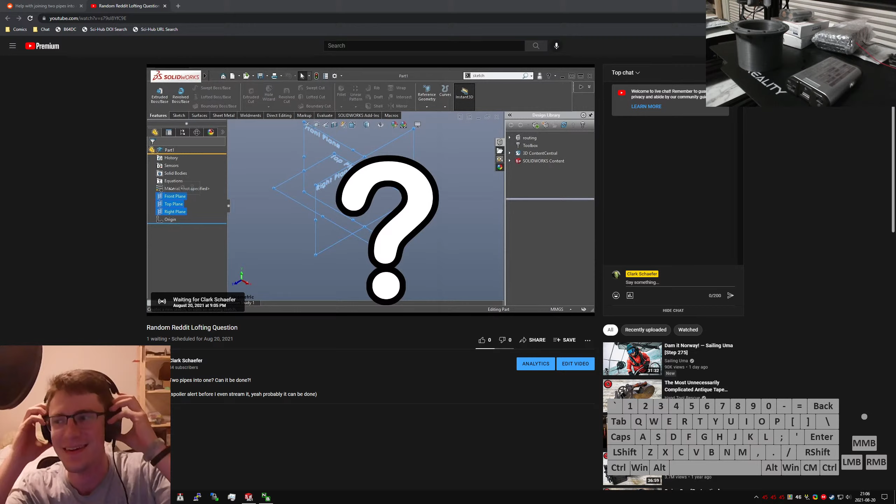Forgot to hit the giant blue button that says go live. Who would have guessed? Anyway, this guy, he's got this part, and I'm listening to myself stream. Shut up, go away, that's very distracting.

So he's got this part, a slot section over here, pipe section over here. That's going to be one extrude, and this one another extrude, probably a thin extrude. Then the rest of it's all going to be lofts to tie everything together.

Hopefully, guy in the future, you will find this useful. So I'm just going to assume, make an ass out of you and me. I'm just going to have to do a lot of assumptions here. We're making some circles using right mouse shortcuts, making them.

Oh, hang on, I did this in inches. New part file, IPS please. IPS, there we go. Right's plane.

Start with the slot feature so it just works. Whoops, hang on, that's all checked up. Okay, let's say inch. Actually, let's say 0.625. Say inch, should probably, hang on, do I have the...

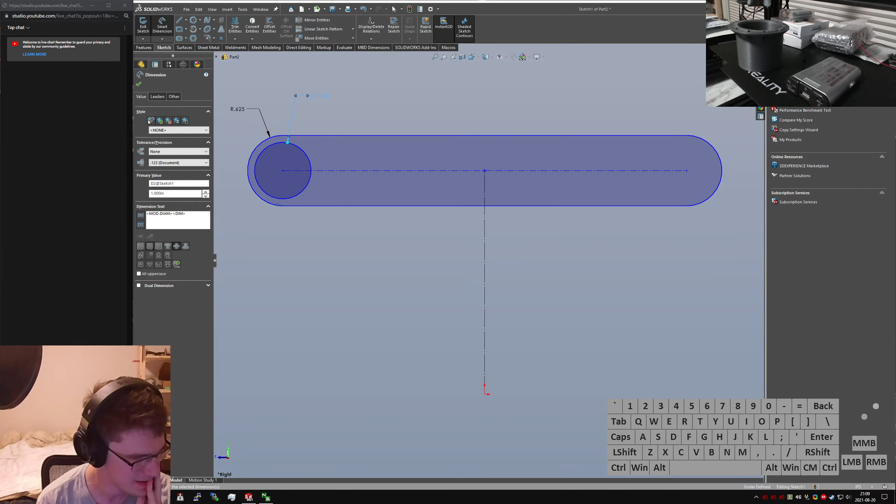Just scroll through my long list of albums and find something. Clowncore is great, but also not suitable for this. Let's listen to Cubic by Light. I think this will take less than the length of the album.

Make those equal. Make this a set distance, like 3 inches. Make this like 2 inches. I want these to be a little bigger.

And that audio is pretty loud, isn't it? It's like louder than me. I prefer to not be.

Okay, we got shape, these are a little closer together I think. The guys, whoops, 2.5, not 22.5. But I should look at this picture again. Yeah okay, we're doing alright. And that's a little less wide than the pipe, so that's fine. We're more like 1.5.

So, extruded boss. We're gonna do 4 inches. Offset of 1.5, and I did it in the wrong direction.

Offset, cool. Got shape 1, right plane. Just gonna do it on the origin because it's easy.

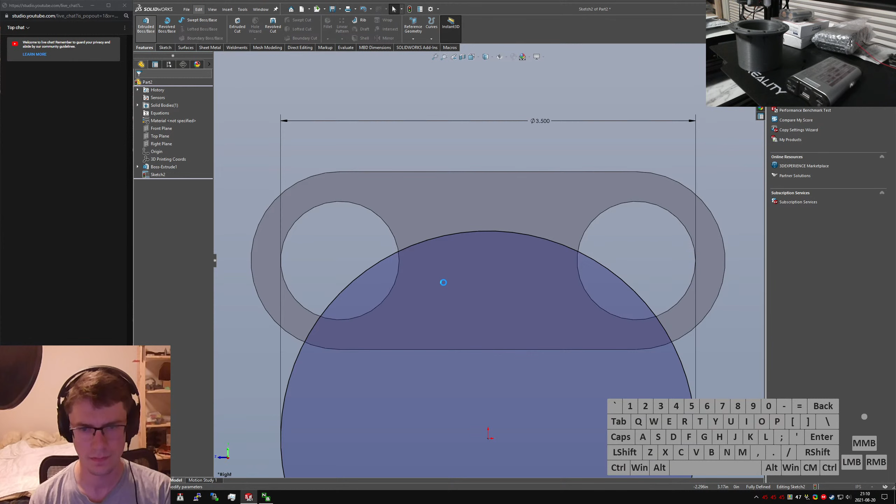So, well, let's make that offset a little bit bigger, I think. That's good, we'll open this up a little more.

Quick reopen, read my comment again. Okay, pipe routing, not the right solution. That's for plumbing basically, it's not for this sort of weird custom joint thing, which I've done before with lots of weird lofts for joining lots of pipes in one thing.

Two separate lofts, each of the two pipes down into the one. A separate loft to go around the outside. Fillet the sharp intersection on the two inner bodies, and then use those to subtract.

And I accidentally made that solid. I think, nope, can't change that to a thin extrude afterwards, so we'll just delete that. Let's say thin feature, 0.25, make sure we're going outboard. There we go, two pipes.

And I'm now realizing he had a lot more space between his. Oh, this one doesn't have an offset. Dirt, dirt, dirt, dirt.

Yeah, there we go. I think mine's a little bit wider than what his was, and I keep closing the stupid window. His are kind of close, but... close enough. If I was smart, I would show up...

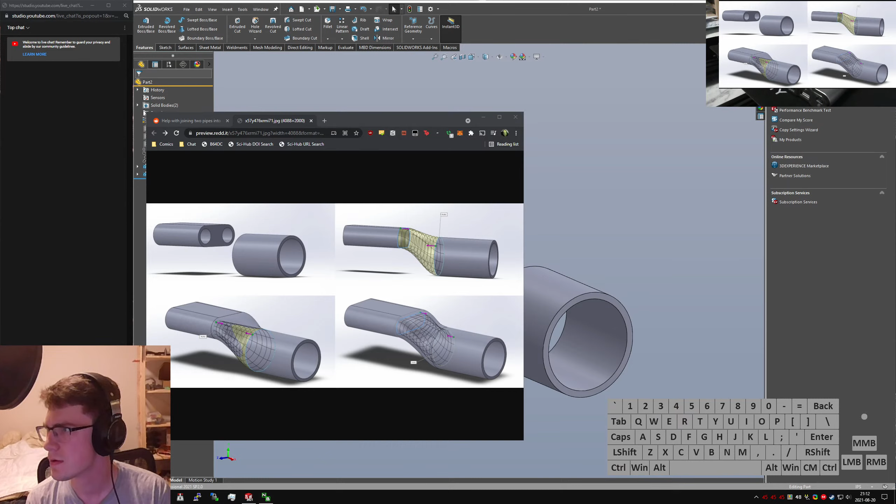Cool, reference image. Who needs an octopi webcam? So I haven't printed anything anyway. Okay, on the fly.

So, loft. Profile 1. Profile... what? I said 2, I clicked the line. Click the line, start, end. Normal profile, normal profile. Here's the one that's like, give me the minimum twist.

Show preview. Okay, that looks fine, but it's not showing me a preview. Display, centerline, more profile, more profile. Yes, but don't merge anything. That looks fine, I will hide that for a sec.

And this music is getting energetic. Whoops, forgot to hit enter and make myself a lofted boss. It's me, the lofted boss. And normal profile, I could have sworn there was a thing in here about having like minimum twist.

What do you mean linear edges? Oh, hang on, no, normal profile. There we go.

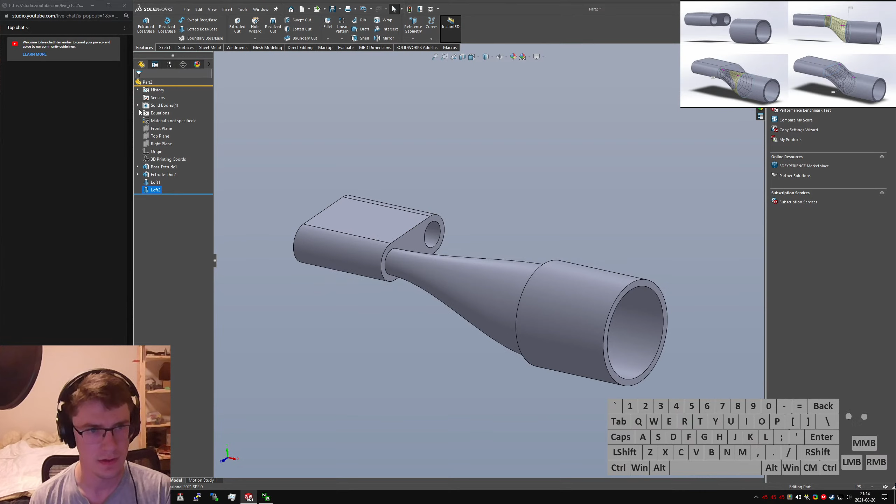So now we show our two lofts. That looks pretty symmetrical. The other thing you could do is, actually, I will just hide that body for a sec, rather than worrying about the possible silliness.

Mirror feature. Actually, I don't want to mirror the feature, I want to mirror the body, so that I have two bodies that I can combine. This way I know for a fact that I have two bodies that are exactly the same.

I don't have to worry about any twisting silliness. So we'll combine those two guys, say add, what? Okay, two bodies. Fillet.

Put that line in there, say 0.5. Maybe 1. Nah, 1's too big, I guess. 0.75 maybe? He doesn't like that either. That looks fine.

Does it? Not a huge fan of that. I think it's one of those things I'm going to have to tweak early in the feature tree once I have the whole rest of it sort of fleshed out. So we'll hide that guy for now.

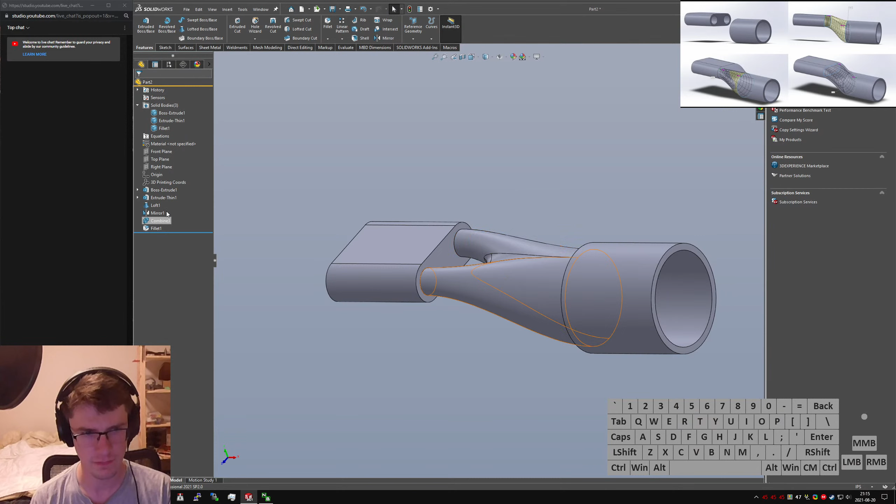Loft, selection manager, pick me a loop. I want this loop, please. Or just don't, I guess. Okay, is this one? There we go, okay. Gives me the profile, and the other profile.

What? Normal profile, curvature to face? Sure, what does that look like? Oh, gross, okay, it's complaining about self-intersecting geometry.

Oh, maybe I should make a center line. Oh, I just had to pick next face. Yeah. Nice, doesn't even look—ooh.

I don't want to merge that yet, don't merge. Okay, combine, say subtract, pick the later loft, then pick first loft. Oh, gross.

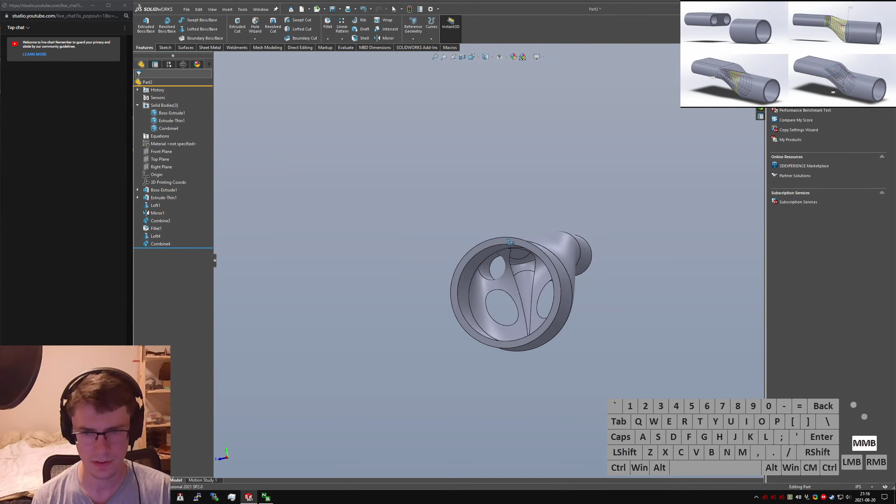Okay, so let's take a step back. Let's visualize this guy, and then turn on transparent for the outer one. And then what I'm gonna do—oh, just show me the freaking preview. Or don't, I guess. Since I suppose that's fine too.

Curvature to face, normal profile. We need to pick the next face. This one has to be like 3. Nope, too much.

And it's 2. That seems fine. Although I think I want to shrink the influence of this one a little bit so it clears that better.

So maybe 0.5. Yeah, and I might even—oh, nope, hang on, now it fails to clear up there. Okay, so we can't deal with just 0.5. It just gets real close in there, doesn't it? Phooey.

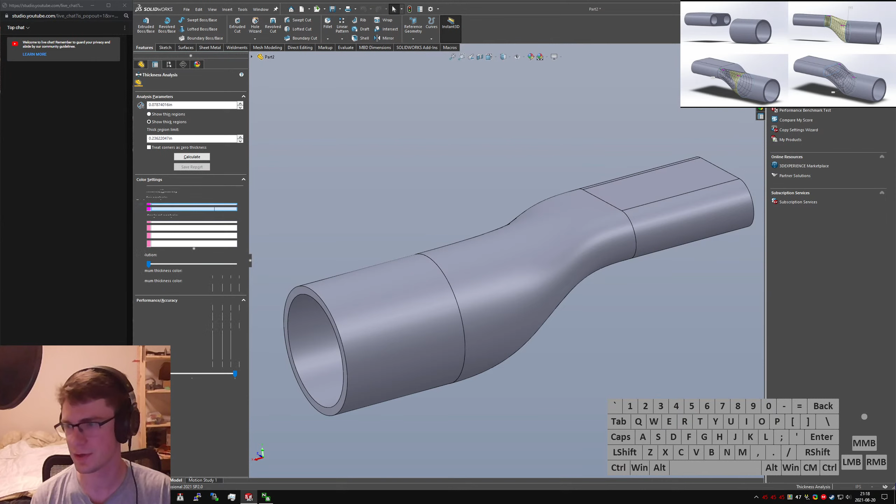And yeah, give me that one. Whoops. I don't use thickness analysis very much, which is why I'm going to make—oh, that's going to be all wrong. Cancel, cancel.

Show thin regions, that's what I really care about. And resolution's probably too high. Whoops.

Hey, I haven't even gotten caught out for playing copyrighted music, probably. I kind of hope I do, actually. It's nice when it gets caught, and then maybe what little ad revenue that I will never see will go to Light instead, because they're a good band. I like them.

Okay, this is going to take way too long. Cancel. Crank that resolution way down. I don't know why left is always less, and I bet it's always less because I always forget to click it.

Ooh, hang on, can I pick just that face? I don't really know how this tool works, so—oh, it seems to be going quicker now. I could also just section through it a little bit, but there we go, okay.

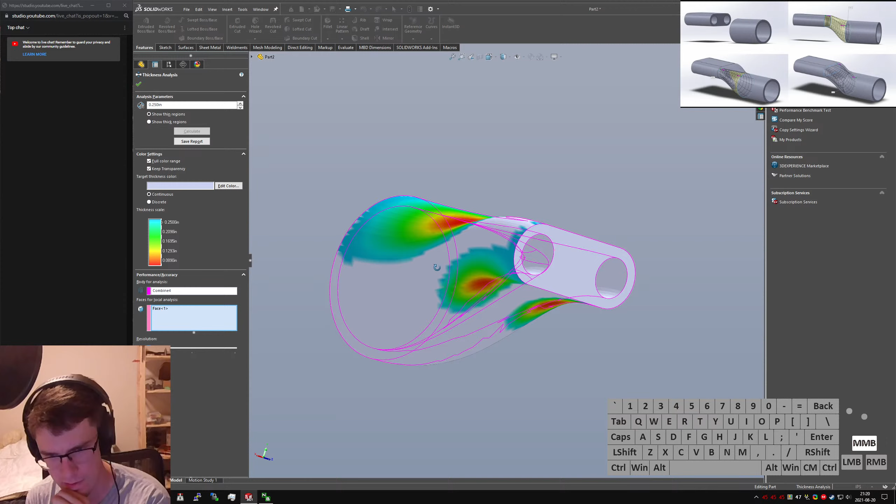Okay, let's try tweaking this loft here. Let's say it's go down to 1 and 0.5. A quick thickness.

Is somebody messaging me? No. Oh. I was gonna send this to a friend. Blank screen.

So now we're dealing with still a little bit tight up there. But if we—okay, hang on, let's do this the easy way. Where are we thin? Normal. Got thin spots up top there.

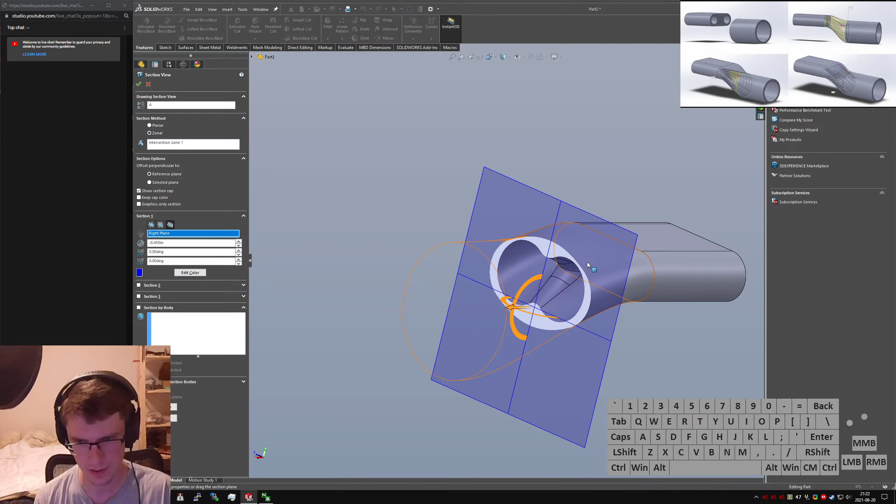What if, instead of combining, we say shell—learn how to spell shell.

Square by Light, very good song.

It's, oh, you know what? That's gonna break horribly because I forgot to click shell outward, and it's really complicated. Oh, hey.

What if instead just worked? Love it when that happens.

So now, what's this loft look like in comparison, like at the same time? Okay. So a little bit of silliness.

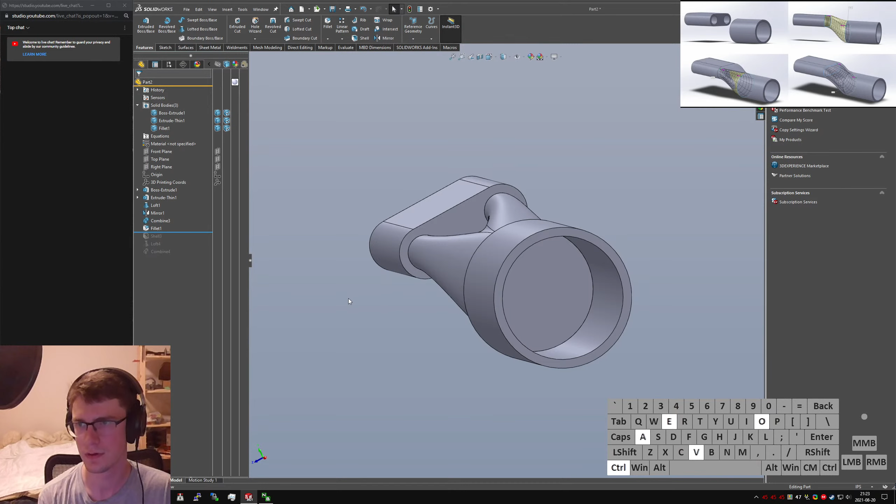But if I want to do that shell, I also have to duplicate the body first. Move, not move face, move copy, please. And we're going to copy it, or copy rather.

So now I shell it, and I still have an inner body, which is good. Ooh, if I apply the shell to the copy body, well, nah, whatever. It'll just break the later combine, and that's fine.

And we can tell the combine to operate using the duplicated body, not with the shell, but with the copy body. And that means the internal faces are going to be the same. So now...

What? Show problem. I don't know why I'm telling you to show problem, because it's not going to, like—oh! Or I guess it'll tell me what the geometric problem is. That usually doesn't, like, work or do anything interesting, really.

I almost want to do this with surface modeling and just be gross.

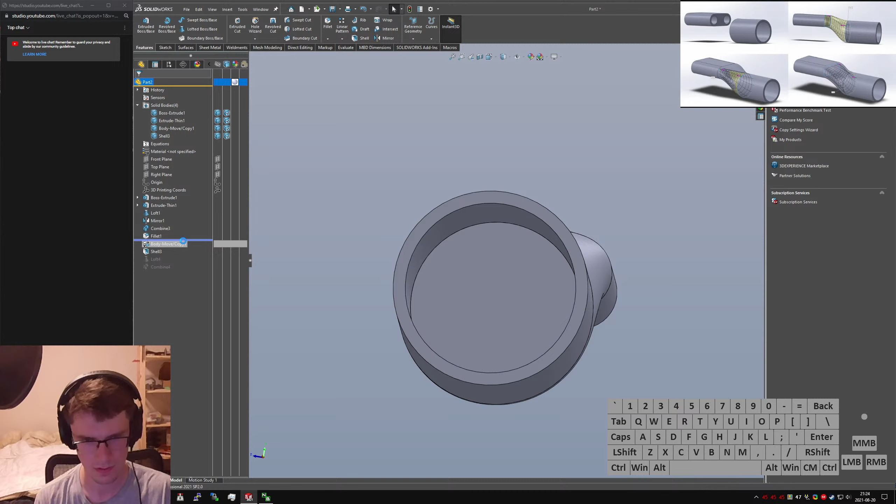How do I fill that space nicely?

Time to throw everything out and start again. We're just gonna, whoops, hang on. Just gonna delete all this. Say, yep, that's fine. Okay. New plan. Sketch. Top plane.

I'm gonna do 2 arcs. We're gonna tell this guy to be midpoint of this line, so he'll be right in the center. Tell that guy to be tangent to that. These two to be equal.

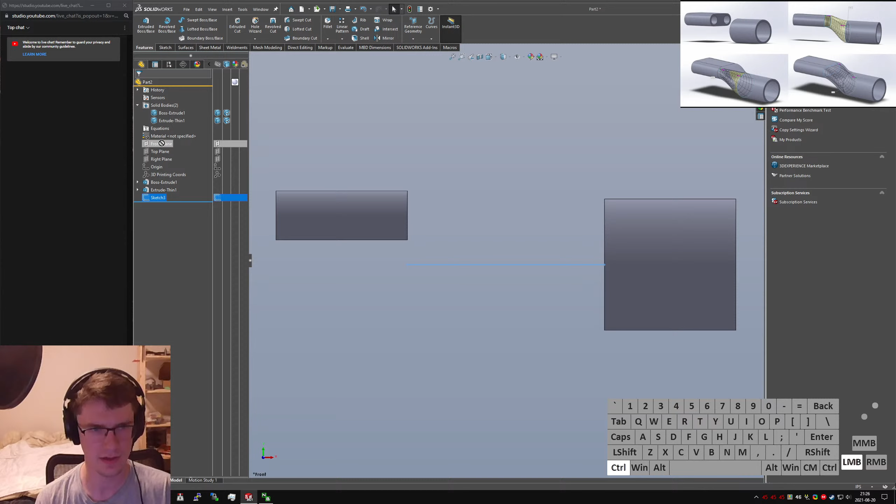Now we're going to come over to the front plane. Do another one. Ooh, actually, can I just click and drag this onto the front plane? Yeah! Copy paste onto the front plane. Alright, there's no reason that should have worked.

Do the same thing, lots of midpoints. Ooh, whoops, this one also needs a reference line because it doesn't have a way to tell itself to be tangent either. Oop, that guy didn't get to be horizontal though. Now he is. Okay, so now, click these two and do project curve, I think?

Yeah, yeah, cool, okay. Now, Loft it from this guy to this guy. Center line, this guy.

What does it look like? Oh my god, it's gross. Oh, I hate it. It's a bird, it's a plane, it's gross.

Normal to profile, normal to profile. Ooh, that's looking gross. Let's roll with it, let's... Is that with the normal to profile? My god, it's horrible looking.

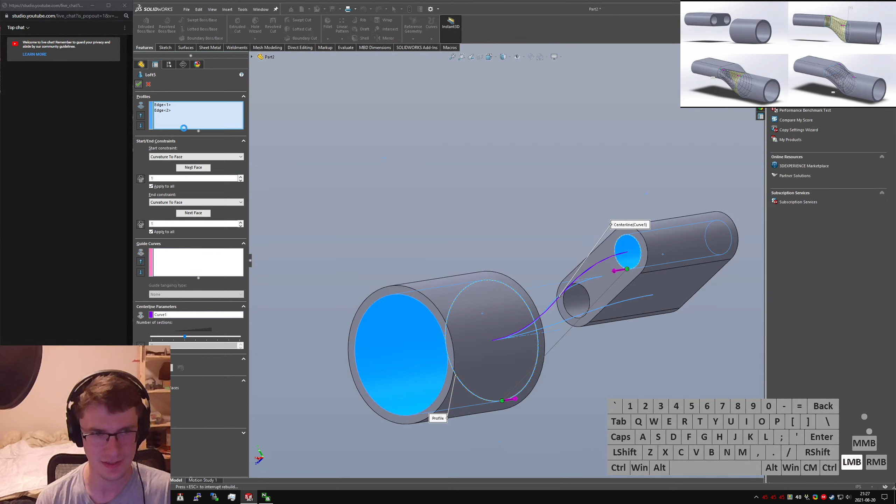Okay, let's instead do curvature to face. Curvature to face, let's see if that comes out looking less gross. Nope, still gross. Okay.

Oh! Angled by Light. Another very good song.

Ooh, boy, oh, those are going to be so ugly going together. Oh, it's like a pair of horribly fitting yoga pants.

But it has some notable advantages. I don't know what they are yet, but it's different and has advantages, I'm sure.

Still has that nasty tight bit in the middle there. I wonder if I can fix that by telling this guy to be asymmetric and elliptic. Let's do conic rho, actually. Conic rho is nice.

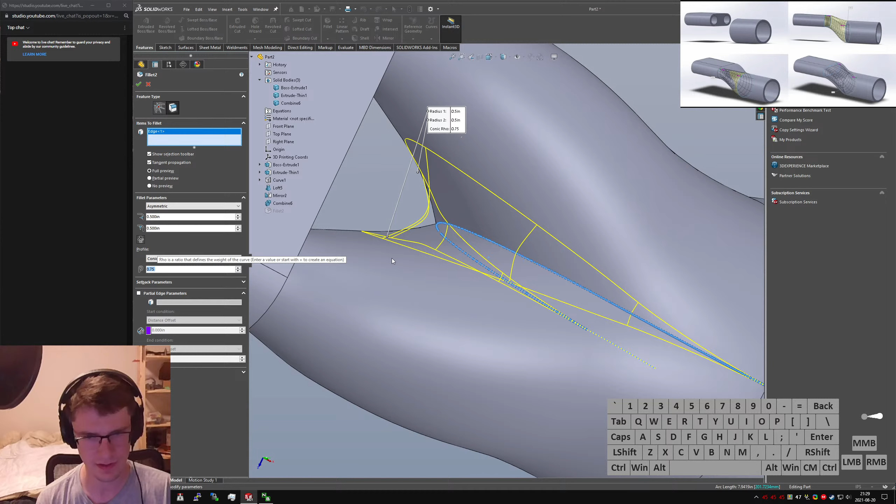Okay, so like 0.75 gets me closer to kind of squarish. Nope, that one fails. What about 0.25? Self-intersecting or its loop is bad.

Well, I mean, yeah, it's something that I designed, of course. It's got a bunch of terrible, awful properties. Radius 1, radius 2. Ow, no, be symmetric. Goodness. Nope, still fails. I think anything that's not 0.5 is going to fail, so...

Ooh, curvature continuous? What, that one fails too. Fail if it's smaller? No, curvature continuous. There we go. Looking like a normal amount of real bad, though.

Okay. Oh, it's still so gross. Okay.

So I have to use this sketch for the center line sketch elsewhere. So now we're going to do a loft.

Oops. Selection manager, pick one line, tell it to propagate. That's good, pick the other one. Start ends, curvature to face. Next face. Curvature to face, looks fine.

Guide curves. Ooh, no, I need centerline parameters, not guide curves. And I don't want to merge, and I want centerline parameters. Gotta use this one.

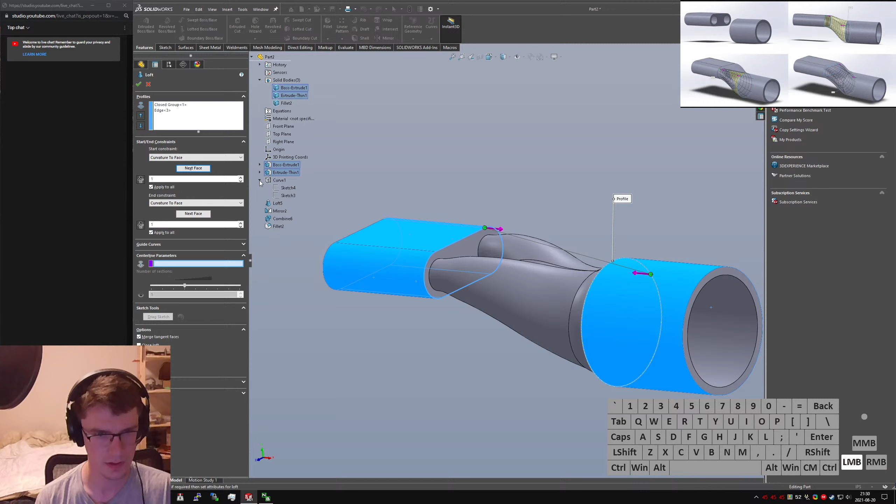Ooh, that is even more gross. Oh, God, it's way undersized too. Like, it doesn't... hang on.

Oh, mesh preview, mesh preview. That's the thing I was forgetting how to do.

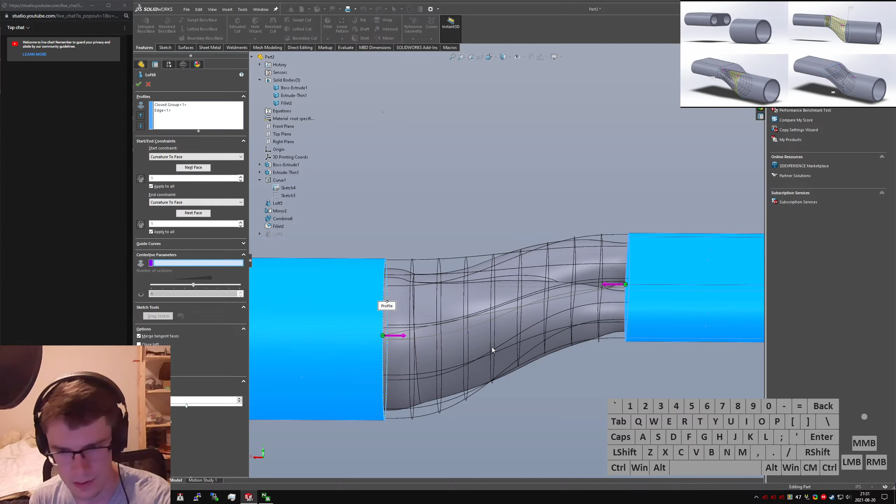Okay, so no center line. Number of sections, let's crank up the mesh density a little bit. Get a better idea what we're dealing with. Because what we are dealing with is a mess.

Centerline parameters are not helping. It's just not doing that any favors, so we're going to get rid of the centerline.

But this, with the mesh preview, can get an idea where our problems are going to be beforehand, kind of. You know, that almost doesn't look too bad.

Combine, subtract this guy. Whoops, no, this guy, subtract that one.

Okay, now do the thickness check. Evaluate for thick.

D by Light, also a very good song. This whole album pretty much bangs, so.

Still only 1/10 of an inch in that crunchy spot. I think...

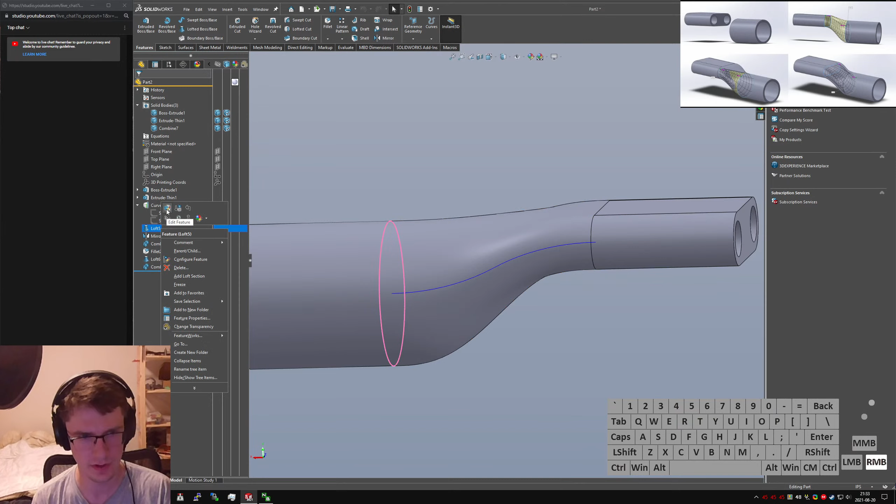Okay, with this loft, I'm going to reduce the influence of both of them, and that should kind of straighten it out a little bit.

Whoops, did I grab the wrong loft? Nope, that's the right one. Okay. Nope, that's worse.

Oh, I can go to this curve too. It's not doing anything.

Who just emails me? Oh, Amazon telling me my package arrived. Thanks, Amazon. Okay, that didn't work.

Hey, that looks kind of reasonable.

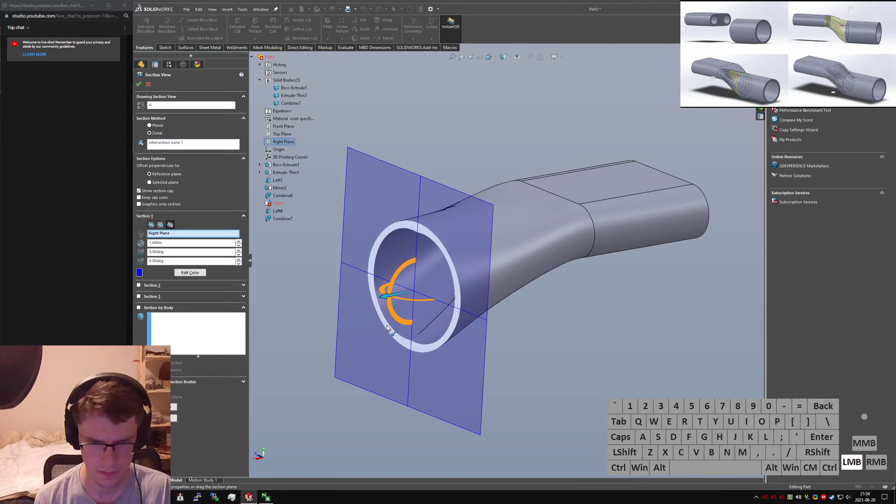Still gets real thin there. I'm gonna try something weird. Well, first I gotta fix this. Fix my pants.

Really? Curvature continuous isn't working anymore? Wow, a lot of the larger radius ones aren't working at all. Okay, so that's kind of where the problem area is, right where it fillets.

I guess I could make an extra sketch that goes around this to give me kind of a buffer zone. But I think that'd be too easy, and also sensible from a design perspective, to say nothing of why he's got two real small pipes going to one real big pipe.

Okay, let's do away with the loft for a second, see if the shell outward. There's gotta be a way to make this look nice.

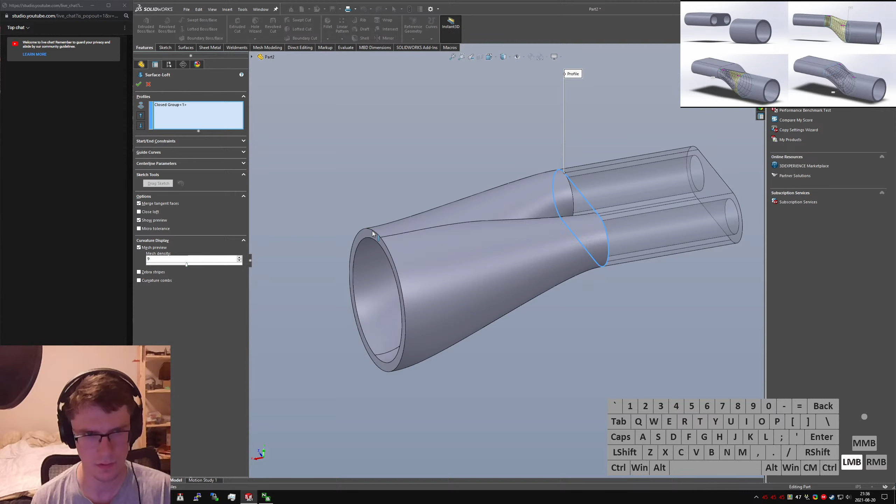Okay, surface loft. Or lofted surface, rather. Selection manager, so I can pick one and go all the way around, say okay. Then, whoops. Oh yeah, then it gets weird. Okay, another closed group.

Curvature to face? I guess it really wants... Oh, hang on.

Okay, pick all those guys. And give me... I guess show me this guy again, because I need this to have... And then hide the shell for a sec, so I can have that other surface.

You know, maybe it's okay to have this be kind of a straight loft. No, wait, no it's not, because then it doesn't... then it doesn't, it's not going to join right.

Okay, hide those. Delete face. Hang on. Maybe deleting isn't what I want to do. Maybe it's...

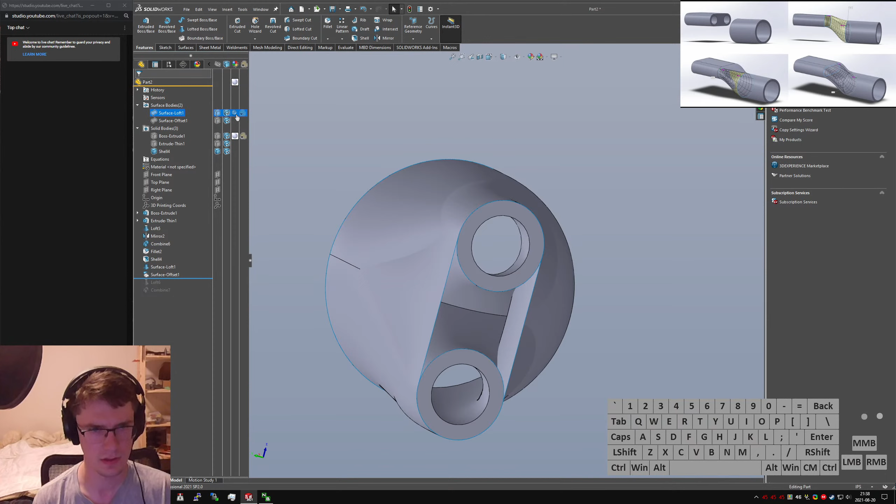Offset surface. Pick these two surfaces, and then do 0. Then show my surface bodies. Hide those, make sure I don't delete anything. Then delete face.

Ooh, I think I can delete these two as well. Oh yeah, just delete them. Don't need to delete patch.

So now I got a pair of pants surface. And then we'll do an intersect between these two surfaces.

That didn't work at all. Okay, I can't just knit those together. It's not gonna let me.

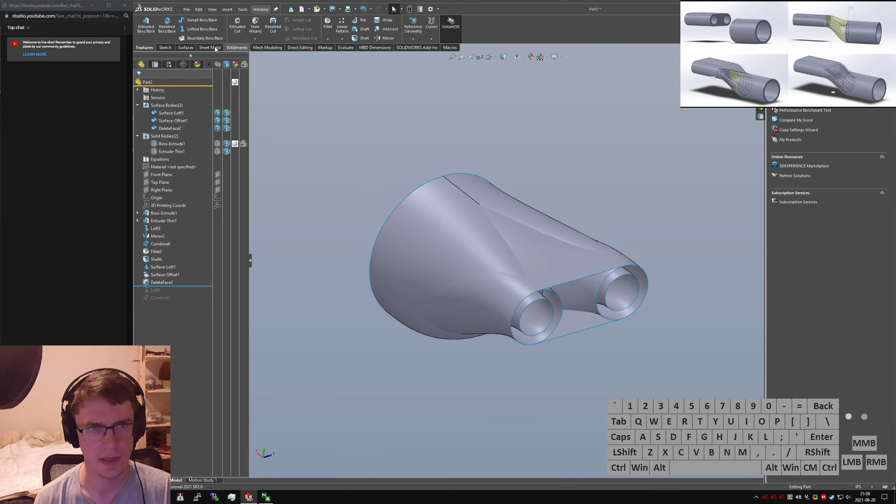Let's do... Hang on, there's a particular tool for doing this. Trim? Mutual, both of you?

It's not quite complete. I still need to grab the outermost surfaces on the bottom here. Oh, this is very gross. Okay, kept surfaces. Not quite everything.

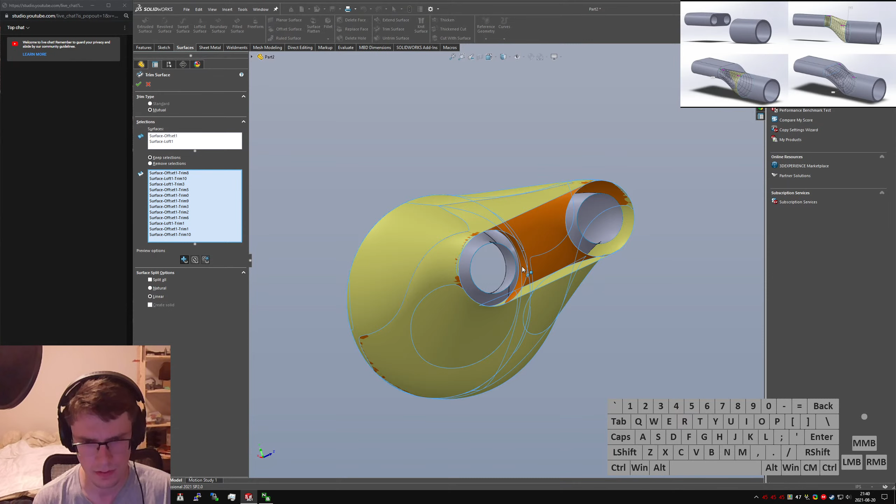I think that's a manifold, or close to it. Oop, hang on. Don't keep this bit in the middle here. Thank you.

Okay, let's see if I can make boundary surface. Selection manager. Just let me pick the line.

Filled surface, I guess? I have no idea how filled surface works.

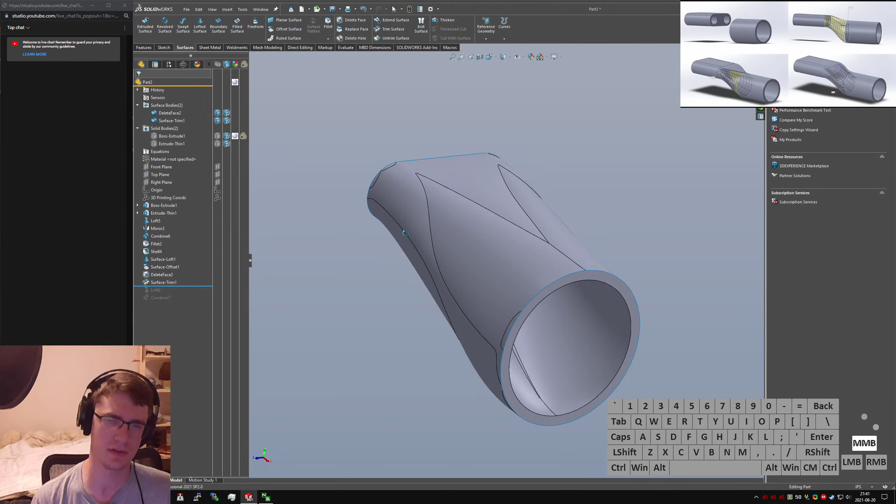I could do really gross things, and I could just... this is so bad though. I don't like that very much.

Planar surface. Bounding edges. All these ones. What? That just works?

Okay. Yeah, knit all those guys together. Create a solid. Merge them. Or wait, what's this guy? What does that do? We're gonna find out.

I don't have the surface property manager. What is this? What does it do? Oh, seed faces. Okay.

Real gross, but it works. I don't remember what this extra loft was. Oh boy, I should disable it is what I should do. But we'll ignore him for now.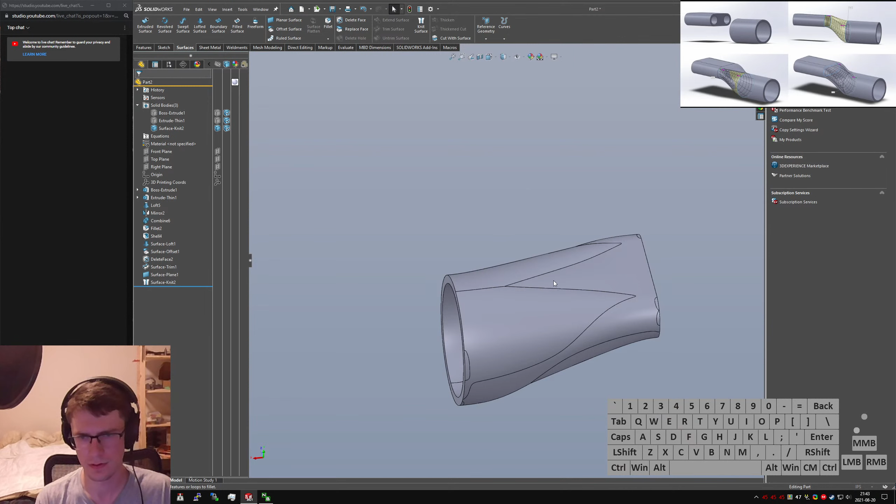Ooh, that's crunchy. That shape is playing with Solidworks' ability to make sensible surfaces, for sure. Yeah, that's real messy.

I'm surprised it's allowing me to make fillets there. If we do a quick evaluate and check curvature, I'm sure it's real gross.

Ooh, let's make this extremely difficult to do a curvature continuous. Oh, zebra stripes, that's real hard to look at. It's probably going to break in a curvature continuous, all things considered.

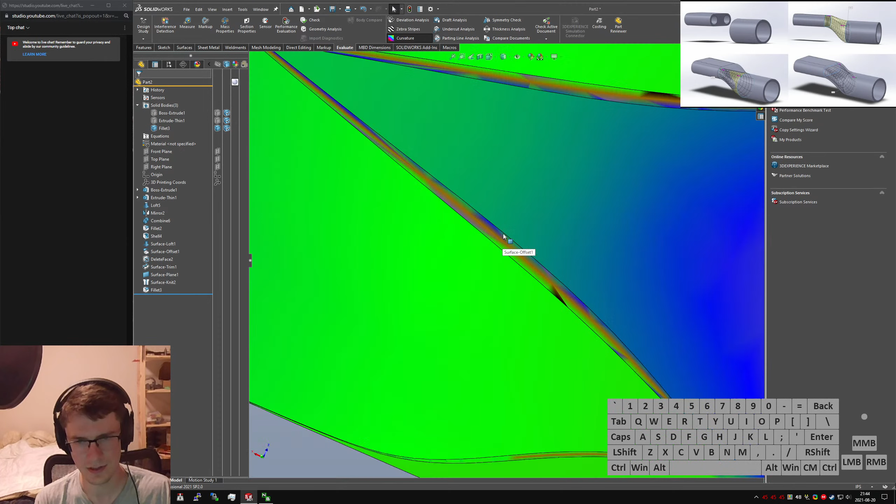It didn't. It doesn't like it though. Just totally broke zebra stripes. It's like, nah, bud, I refuse to do it.

I don't blame you. This is impressive, though. Doing that cleanly is not something I would expect it to do successfully.

Can I make this much bigger? Can I do 1 inch? Is it gonna break? It'll probably break. Yeah, it broke.

Maybe 0.5 though. Nope, not even 0.5. Doesn't really need it. I mean, this model's pretty smooth.

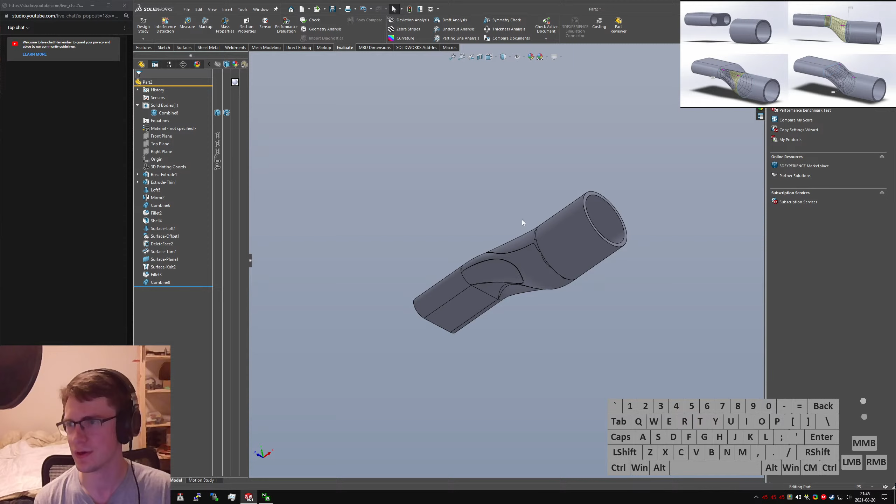Yeah, so joining those pipes, not going to be easy, especially with a nice exterior shell. There are ways that you can do it if you're willing to accept a fairly simple cover around it, if you're not too worried about getting close to the surface. If you are worried about wall thickness, like if this is going to have some pressure in it and it's 3D printed, which you shouldn't do, don't put pressure inside 3D printed things.

That's just not a good idea. Unless you can do the calcs to show that it's okay, and even then, just like put a safety factor of 4 on it.

Yeah, that is a way to do that. I have some other models that I should probably be working on, so I might keep the stream going. I just gotta figure out if I want to. See, 9:45.

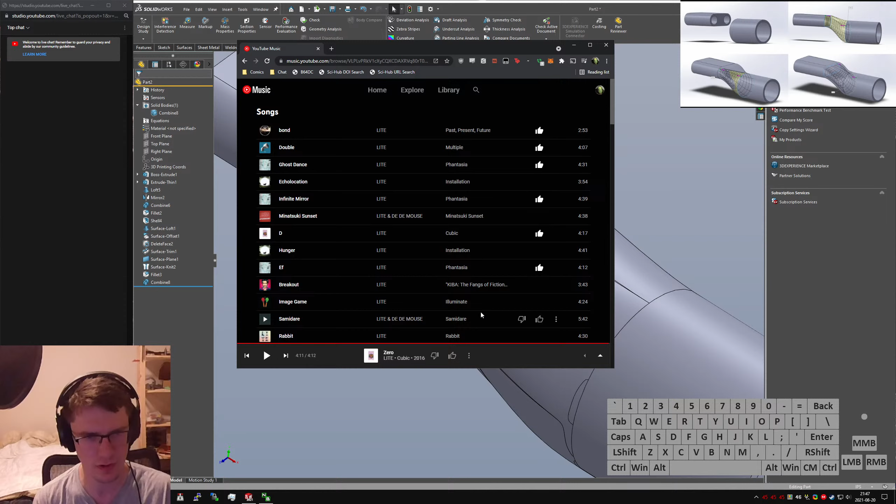Let's go find some more music to listen to. I'll pull up the window here. So we've got Phantasia, which has a lot of entries in the all-time top. And some other stuff - I vaguely recall liking Multiple, but it seems like that one's not widely liked. So we're just going to go with Phantasia.

No, we're not. Let's do... Just Neighbors. I think they have a new album out recently. They do have a new album out! Okay, well, I guess I have to keep modeling for a couple of hours so we can listen to all of Just Neighbors.

Oh, new Just Neighbors! How did I not know? I'm so disappointed in myself. I listened to these guys so much in college, which was only like 3 years ago - but don't you laugh at me about that. I'm gonna go quick chuck this into the project folder.

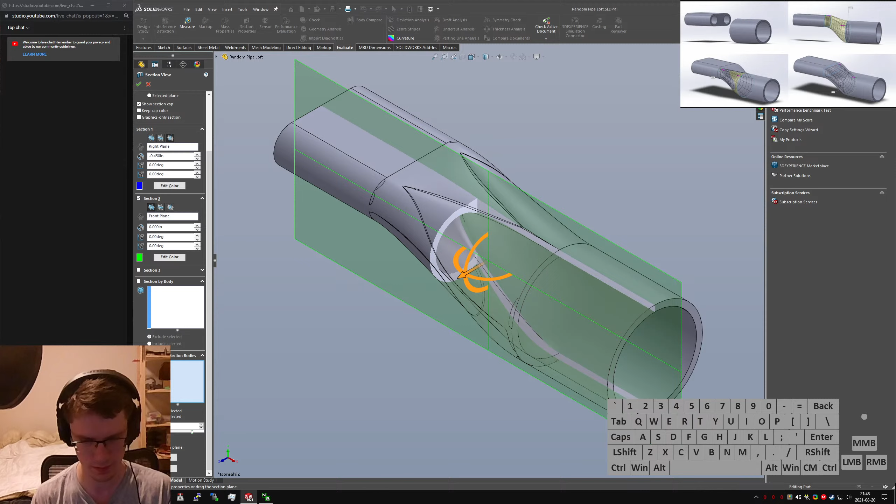Oh no, whoops, accidentally triggered my hotkeys. I have some hotkeys set up that use control and number keys to control the brightness of my monitor, so if I'm hitting control and then a number key, my monitor's brightness changes at once.

Okay, the other thing I was going to work on - so a very long while ago, well, not that long a while ago, but long enough that it feels like a long while ago - there was an adjustable... now that I do it, I don't know what this is. Adjustable clamp assembly? No, okay, yeah, that's not what I was thinking of. That's a different thing.

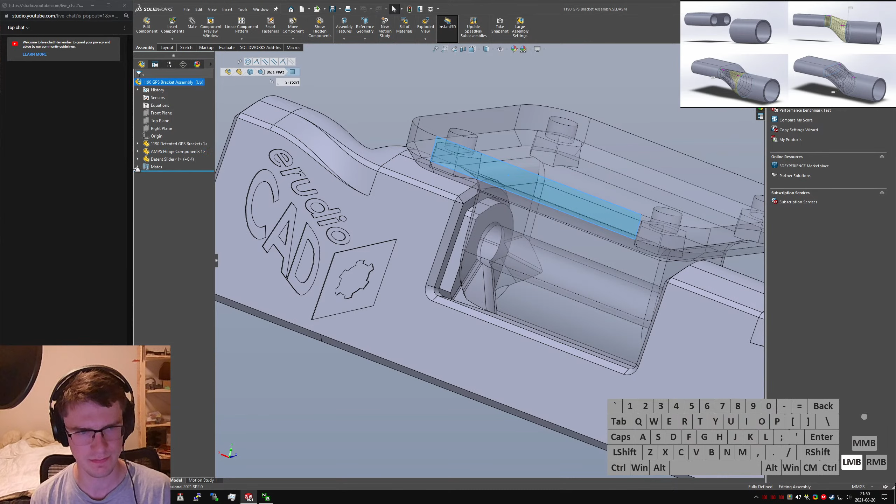Here we go, 1190 GPS mount. So the adjustable GPS mount was a total failure, did not work at all. I think maybe having a double-sided detent would have helped, because its ultimate failure was that it couldn't detent on both sides, but what are you going to do? The answer is nothing - you're not going to do anything, least of all me.

Okay, so something... here we go. Parallel. Coincident. So we need to bring this back to meet this back face. Coincident, yes please. Do a quick confirmation - okay, and that looks like it's in line, and it doesn't have any relative position, which is good, or any normal distance. This does have some normal distance, so it's not for the spec point.

And now turn off that. Angle between the two, 53 degrees off the back. I also don't need to have all this extra back material here. I can... ooh, and, hang on, I gotta go find the signal message with how wide the new backplate is.

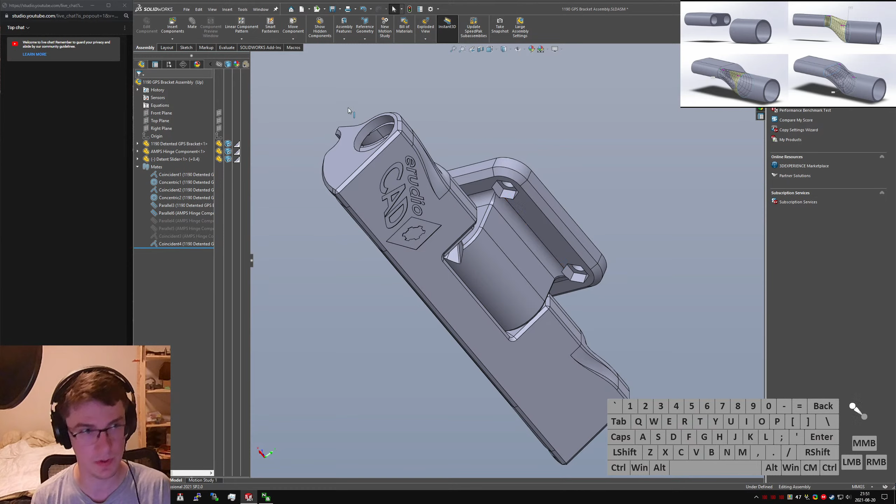2.285, which means 58 millimeters, I think, is what I calculated earlier. Yep, 58 millimeters. Is that how wide I made this one? 54 millimeters. So we need to go a little bit wider to have a nice clean backplate. Ooh, I should base it on this model, but I should not use this model.

So this has to be 53 degrees, and it has to have a flat plate. And it has to have some surface. Okay, working out how I'm going to do this in my head.

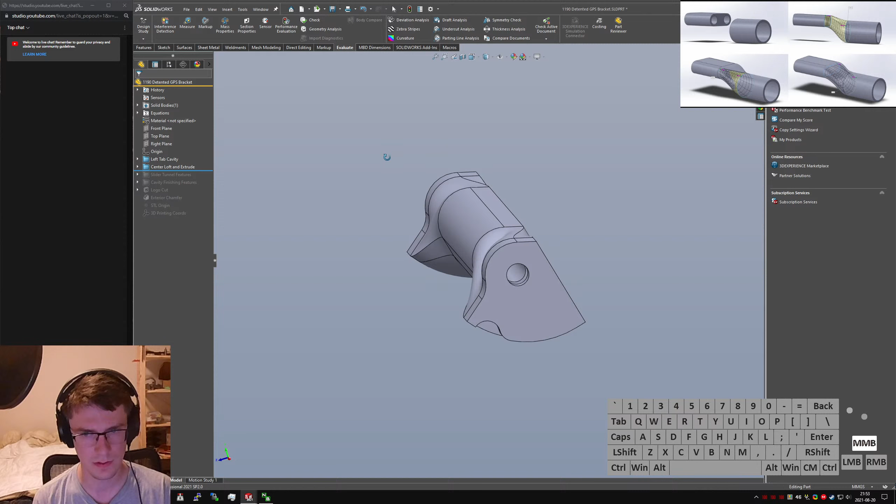To make a new folder - fixed mount. So basically none of the stuff to do with the slider tunnel is going to stick around.

Oops, hang on, no - where do these come from? What? Yeah, just delete all that stuff, don't need it. When I say delete it, and then I say yes to all, I mean actually delete all of it. Thank you.

Oh, hang on, I think I deleted the sketch at some point too, or the loft. Oh, don't save changes - discard changes in assembly. I need to save this as a new file first to make sure I don't delete the old project. Save as. Oh goodness.

A brief window into my file structure. Hang on, why am I... oh. Fixed brackets.

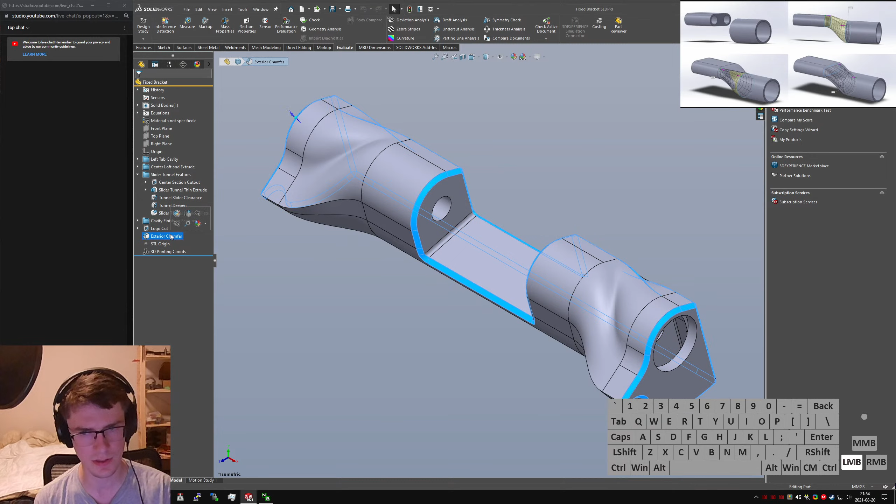Okay, so logo cut - want to keep that. Cavity finishing, that stuff's actually important. Slider tunnel features, those can all go, including the exterior chamfer - that one's gonna have to go, at least temporarily. I'm gonna keep an eye out for dependent items as I go this time.

And its sub-sketch - I really ought to use the delete absorbed features tool more often, it seems like a really handy tool. Oh, do I want to keep the logo on there? Kinda, I think I can move it up into the back, so I'm going to suppress it for now. So we got...

Okay, so we got this transition section. We have this really screwy cross-section that's really not necessary anymore. In fact, I think I can extend that over here, so trim all that off.

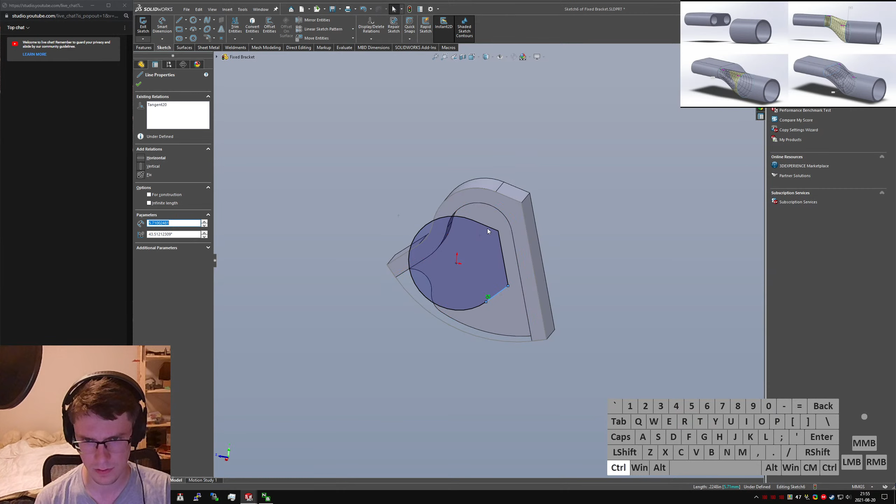That's got about the right amount of... oh God, it's got too much weird twisty in it. That needs some fixing. Gross.

Okay, let's take a quick, better look at these sketches. So we got 1, 2, 3 over here. 1, 2, 3, 4.

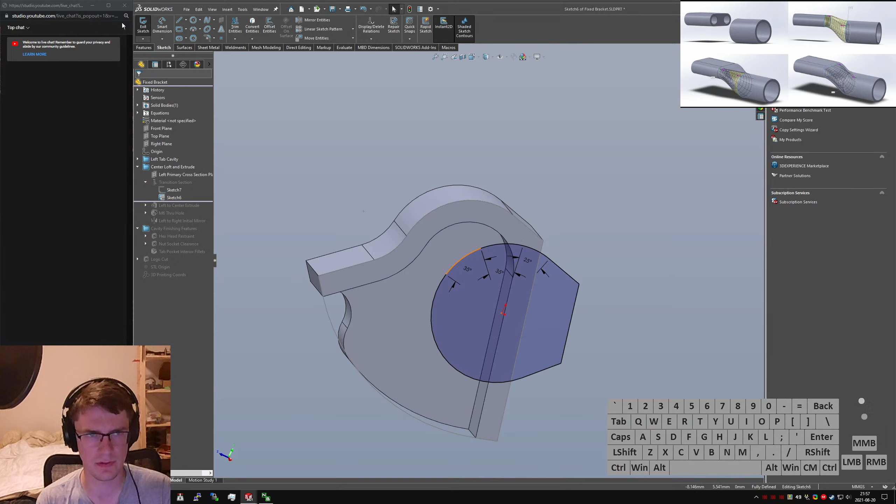I make some very egregious guesses as to what is correct here. Well, not egregious, but very kind of wild. And it's still breaking, which makes sense.

Where's my other sketch? Nope, not sketch 9. Sketch 6. There we go, there's something I can work with. There's a place to start.

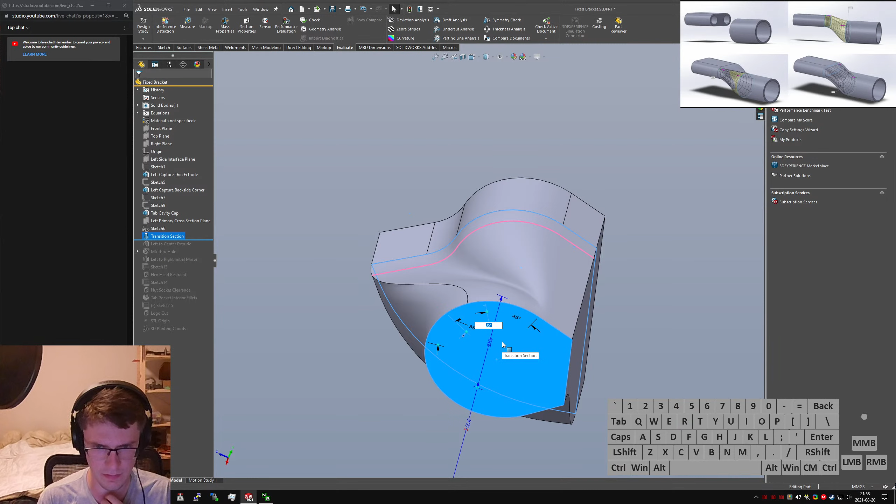Why is that not joining itself up kind of further over? Which is really what I'd like it to be doing. 35. I need to open it up and remind it what it is.

Okay, I guess I'm just not gonna get those to join up, right? Actually, maybe if I clear selection again, sketch, and pick them up again.

Hey, that's looking pretty normal. Nope, still got a butt crack. Hang on.

Okay, so I need one more split, like 10 degrees down. This is the tricky part. I think nobody's been watching me for some time, which is funny. Okay, let's do this 10 degrees.

Clear the sketches again. 7 and a 6. Yeah.

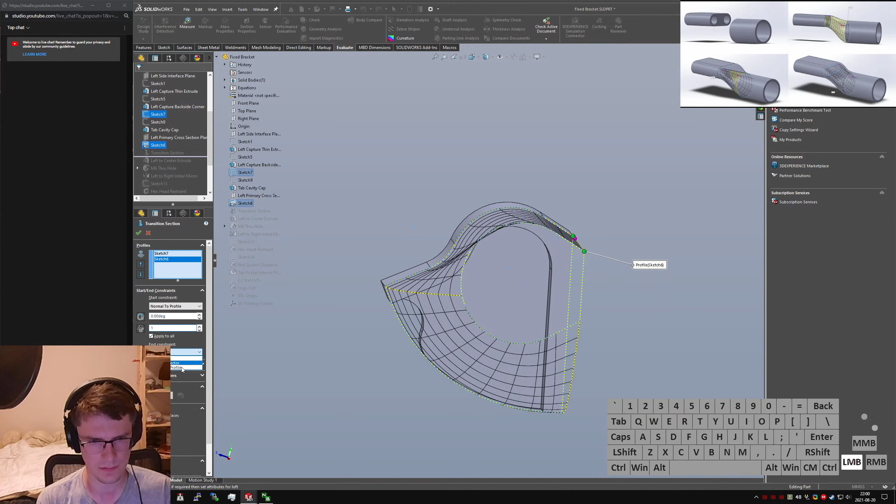And we still have a flat back surface, and everything transitions smoothly. Yes! Awesome, I love it when you drag a feature bar down and everything just works. Feels good, man. Because that doesn't happen.

Okay, so now I need a plane tangent to that and at an angle. First direction, 53. Hang on, I told you to be tangent. What are you doing? Oh, hang on, it started as a 3D sketch. That was rude.

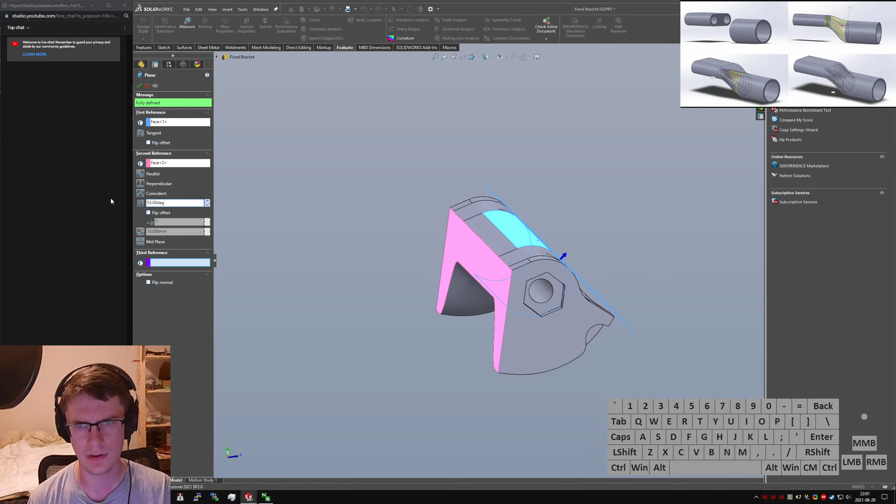Not what I asked for. Tangent. 53. Okay, that looks pretty good.

Just gonna move it up here and out of the way. Planes are annoying. Switch back to a regular tree again.

Why is it backwards? You know what, don't care. Oh, but it needs to be coplanar with that back plane. Huh. Yeah, okay, hang on, need to sketch on the right plane first.

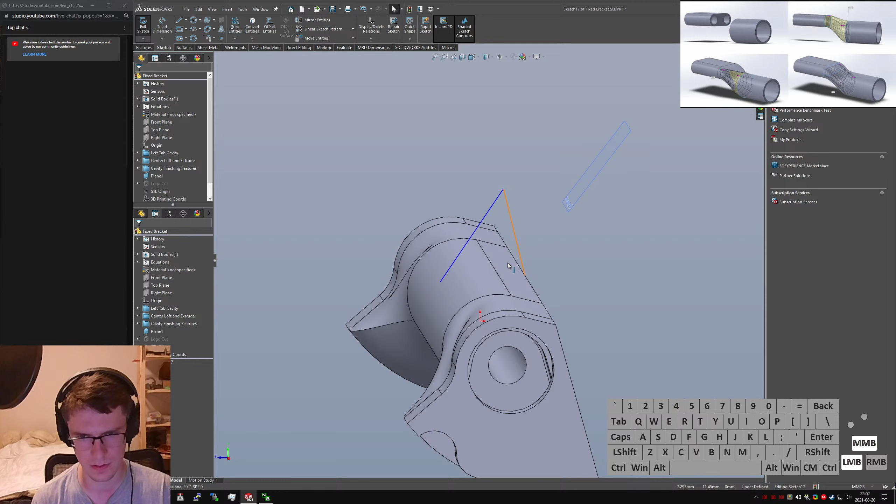Or I guess just don't let me be tangent there, I suppose. There we go, tangent. And collinear.

Can I tell that to be... I guess I can't tell it to be on the surface, but I can tell it to be coincident with that. Oh! And I need the 53 degrees. This is going to be the plate angle control sketch.

We're going to do another sketch up here that says, give me my desired rectangle. And that rectangle is—and rectangle's name was Albert Einstein. I got brain leeches.

Okay, 58 overall. Offset, reverse. Offset's going to be construction. Do add dimensions, because those are important.

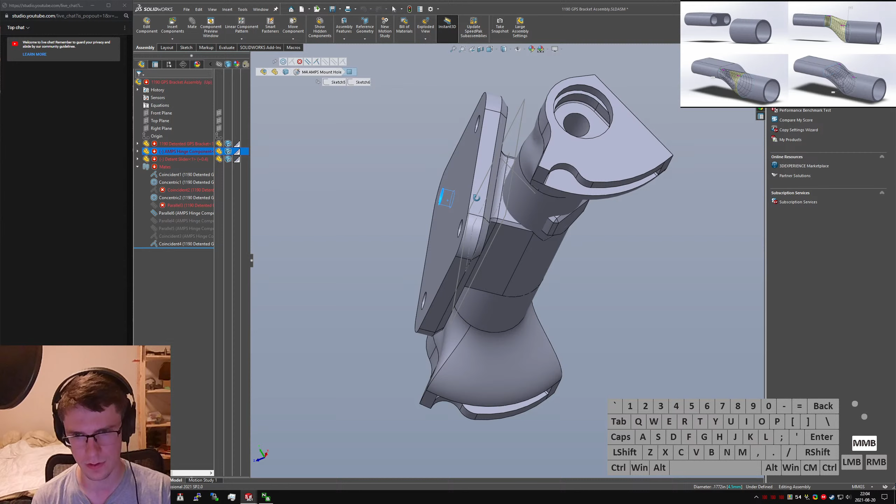Oh, hang on. Did I? No, hang on.

That's not a detented GPS bracket, my guy. That is anything but.

Okay, actual detented GPS bracket. Place. Fix, save. Yeah, quick unsuppress. And we'll suppress this guy.

Hang on. Oh, only one of these parallels can be unsuppressed at a time. Well... yeah, that's fine.

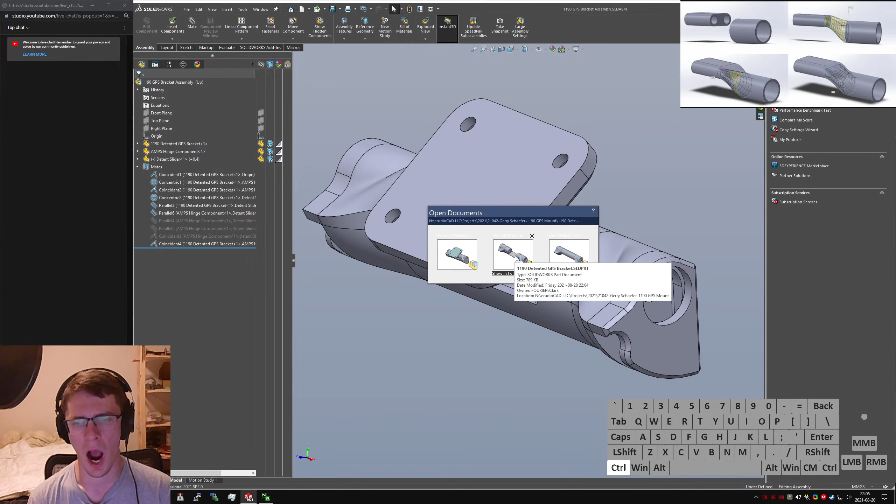I'm sleepy. Okay, I don't need any of the rest of this, but I do need to open this guy so that I can close out of this and anything extra, but I do care about this whole pattern.

Not the minimums though, 38 by 30. Okay, so don't care about the distance per se, but I do care that it matches. So 38, 30.

Ooh, that's gonna be real tight. I'm just gonna have to... Well, I guess I could move it higher. There's no real reason not to, except making sure that the...

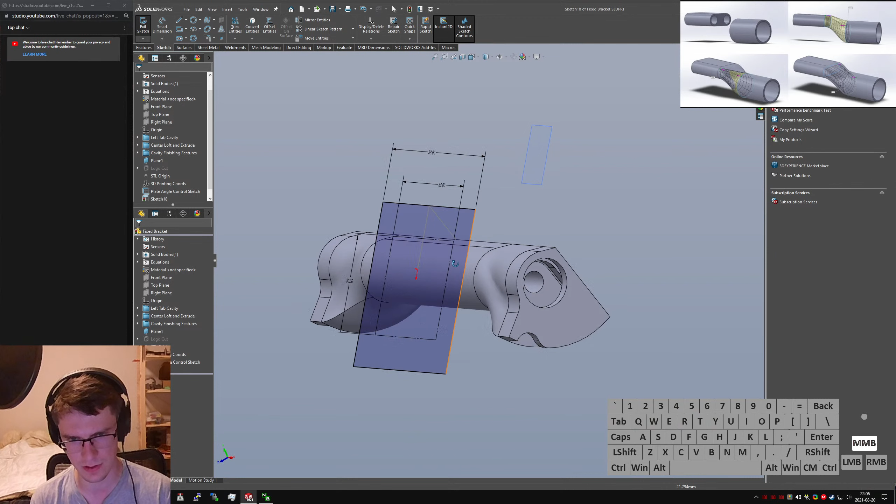Let's see, so if I get rid of that midpoint and add one of these, I think I'll still have enough. I'll just have to trim it off in the back here, and I'll still have a flat surface, and I can fit the fasteners in there, which is fine.

Quick sketch fillet. Actually, hang on, what is that? 58, 38, yeah. What? Why did that suddenly break everything? Ah, that's why.

Yeah, that looks good. Extruded boss, some distance, don't merge. It's not yet anyway.

Thickness was 6 millimeters before, so we'll mimic that, since that piece at least seemed to work okay. And this distance up here.

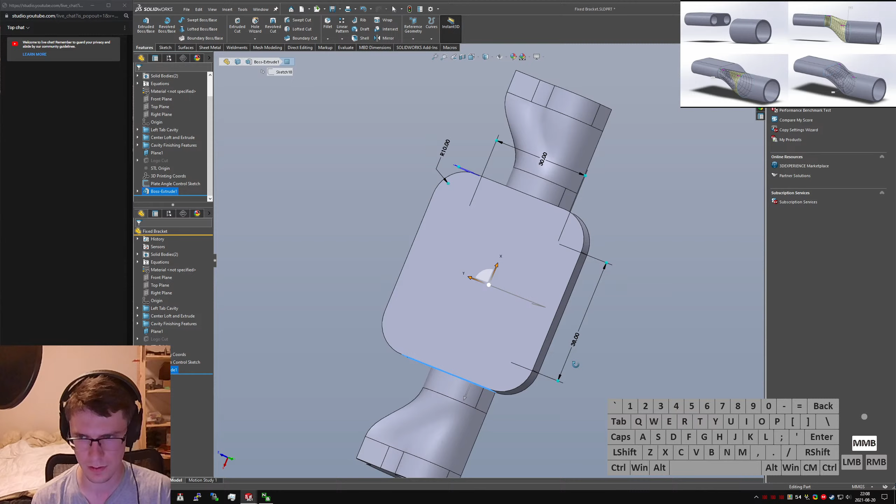Ooh, hang on, I know what it was. It wasn't that I... goodness, I already broke that though.

Okay, hang on. So the reason that that suddenly lost how wide it wanted to be was because I was no longer controlling this width, which is what I actually care about. Fixed.

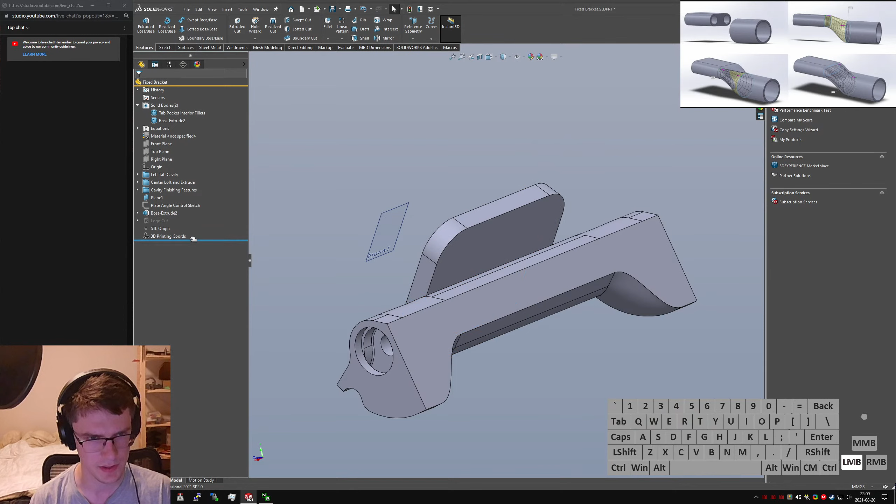Let's get up here. Oops. This is the mounting plate.

Here and say, what are these? The AMPS features, M4 AMPS mount holes, M4 nut cutouts.

Quick hole wizard. Callout format. God, I really need to get rid of that. Hang on.

Options. Do I even have a callout format? I have 8 of them. Or 7, I guess. Some of them even modified this year.

Awesome. File locations. Callout format file, delete. Please, please, please stop bothering me about that.

Now what it should do is it should default to something. Normal screw clearances, positions. Show the mounting plate sketch. Oops. Hit N for normal.

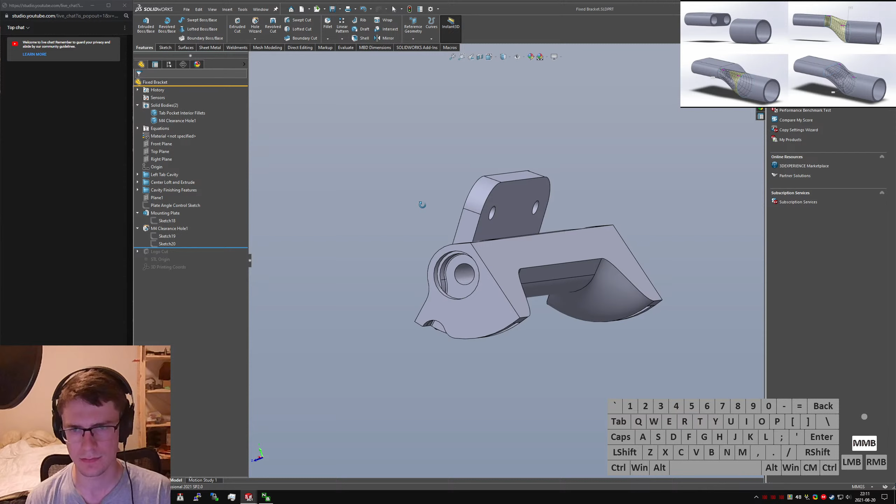Almost ought to add some sort of connection between that first. So I will. Oh, the cavity finishing features are supposed to come after.

Where did I put that through hole? There, I suppose. I'd like to have that hole afterwards so I can just extrude through the middle of that, but I guess I don't get to do that. Yeah, you can't put that beneath either. Nuts.

Okay, let's attach the mounting plate. And we'll move the cavity finishing features back up.

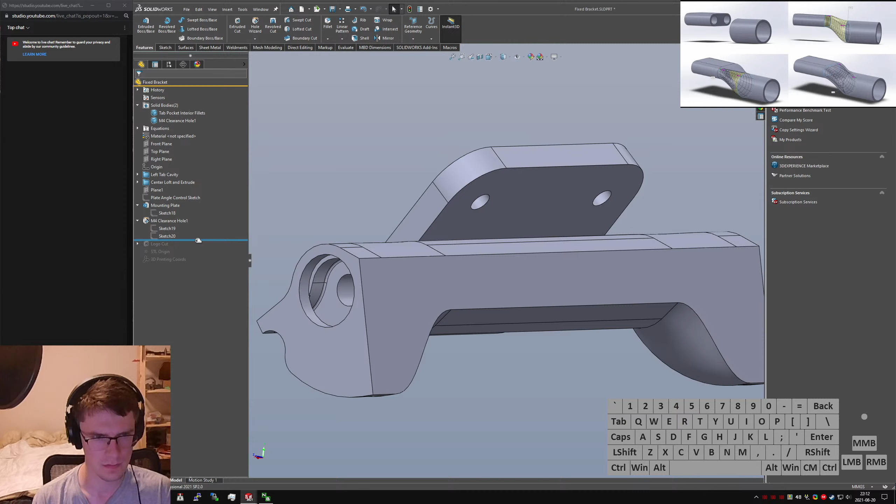Extruded boss on the right plane. Convert that. We make that collinear. Make this one co-radial.

I can define all of this from existing geometry, which is a little gross, but honestly not too bad. Extruded equals D1 at whatever the sketch name for that is, sketch 18. Midplane.

Yeah. Cool beans. Extruded cut. From the right plane.

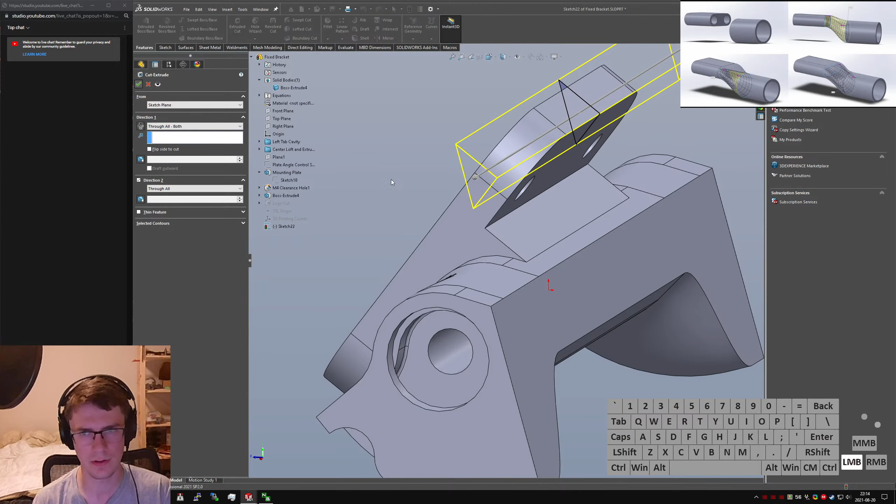Let's move this mounting plate extrude. Give it just a bit of an offset. Maybe 5 millimeters. 3 millimeters. Yeah. Yeah.

I want that a little bit more. Rather, I want that chamfer to be a little less.

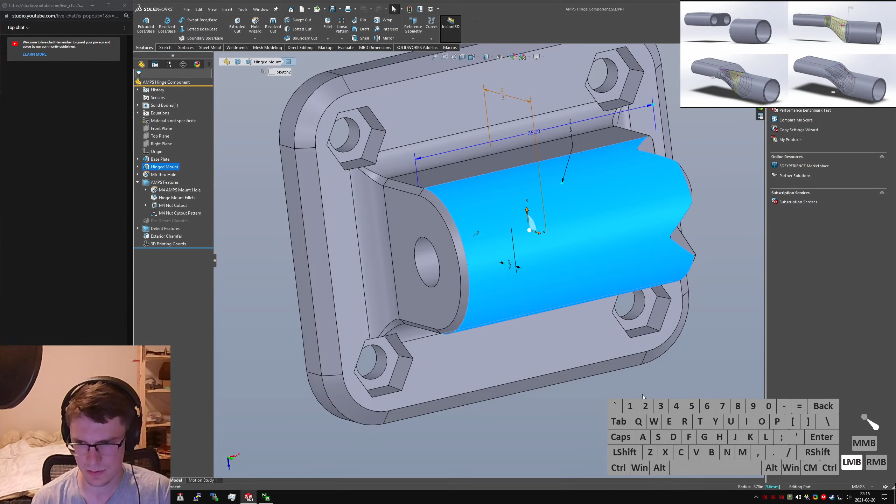Now, what did I do on the backside of this guy? These were 3 mils. Oh, how wide was the radius on that? That was 9.6. That's also 9.6. So I could be fairly confident that when I put 3 millimeter radii here, nothing else is going to horribly break.

Well, that's going to horribly break, I guess. Oh, no, that's right, that's tangent. Smart. Or sort of tangent. No, that's not actually tangent, is it? Is there another fillet there? I guess I gotta do another fillet there. That's fine.

So now we come up here, say normal, extruded cut. This face. No, actually, not true. Incorrect. This face. Extrude cut. This face.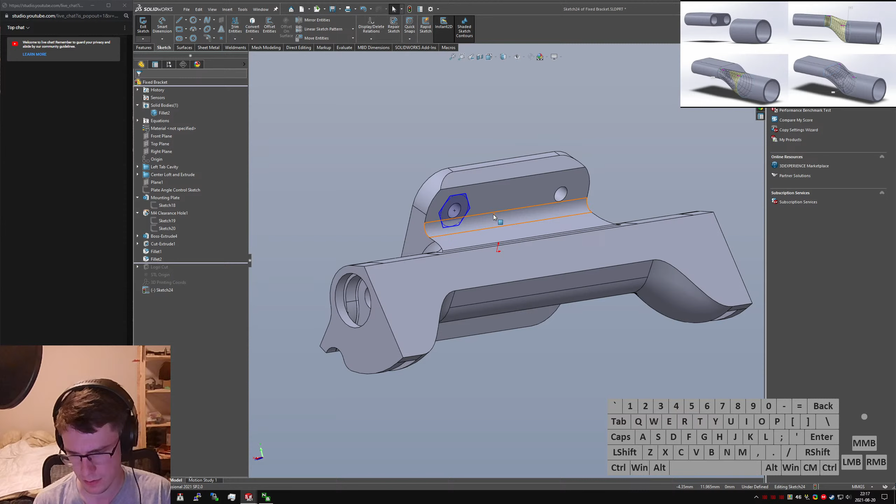This one's gonna be tricky, I think. Or maybe not. Maybe I'll just kind of wing it. It'll work.

7mm, with 7mm, 3.2 deep, 5 degrees of draft.

Extruded cut. Offset. 3.2mm, into the part, other direction. Up to next. Draft outward, 5 degrees. Beautiful.

Pattern driven pattern. Feature driven pattern? It's like a way to sketch driven pattern. Selections, whatever was driving the holes. Just this feature.

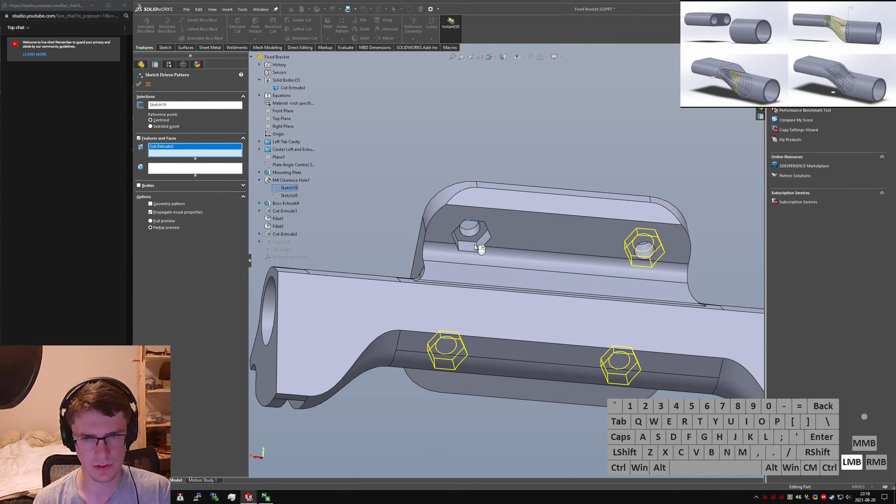What? Full preview, please. Geometry pattern. No.

Cool, it just decides to cut through that again. So I gotta make that blind instead of up to next. Annoying.

So then we had 0.8 chamfer and a 2 chamfer.

And now I gotta go reopen the original part. Figure out what the exterior chamfer was. Okay, 1 on pretty much all surfaces.

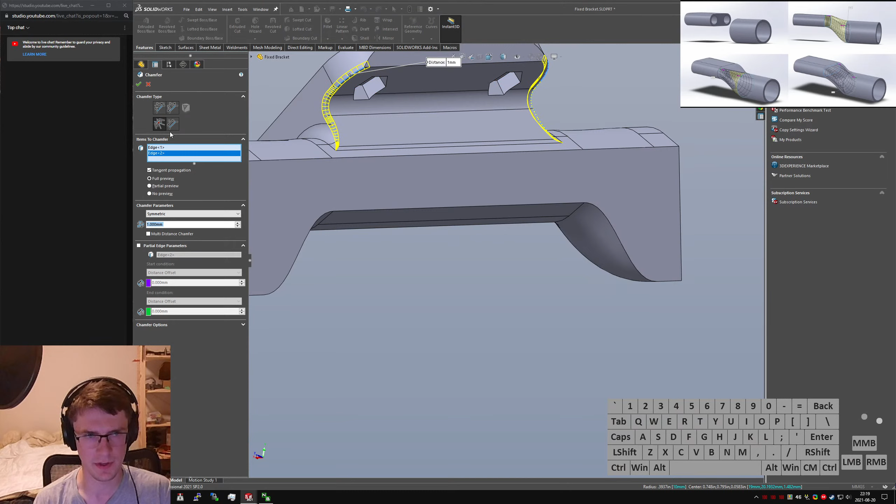I'm gonna pick this style, the offset face chamfer, because it works so well. Oh, select tangency. Yes, please.

Please, please, please give me my automatic tangents. Yes, please and thank you. Oh, it doesn't have any tangents.

I think that's everything that I grabbed. I'm gonna see if this one works. Nope, breaks it. Cool.

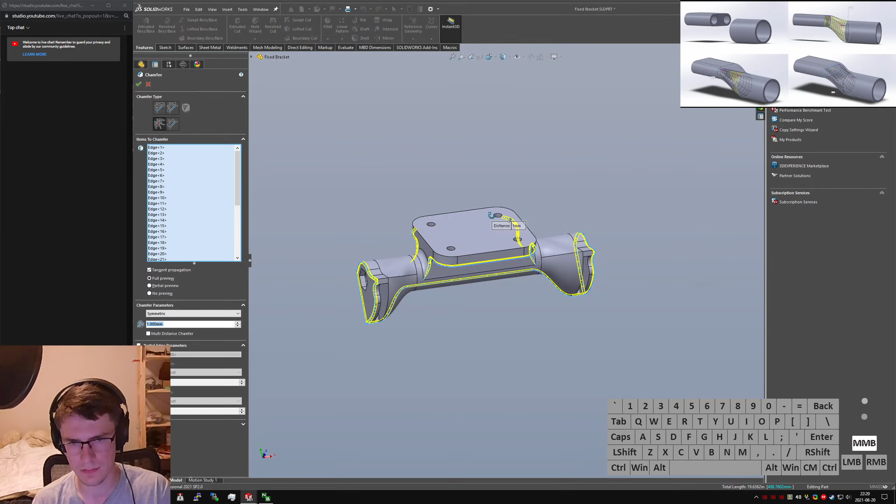This part of the song, Disconnect by Just Neighbors, is good. And you know, I don't think I've actually listened to If It Ever Comes Back, so this is just gonna be new music night.

Okay, quick peep for the detented bracket. Yep, I did grab that one, didn't grab this one. Did grab these, but that one's one contiguous run on mine, so.

We'll unsuppress this guy.

Is there an easy way to rotate this? Doesn't look like it. I think I'm gonna have to move it to the other side. So many points, it's so gross.

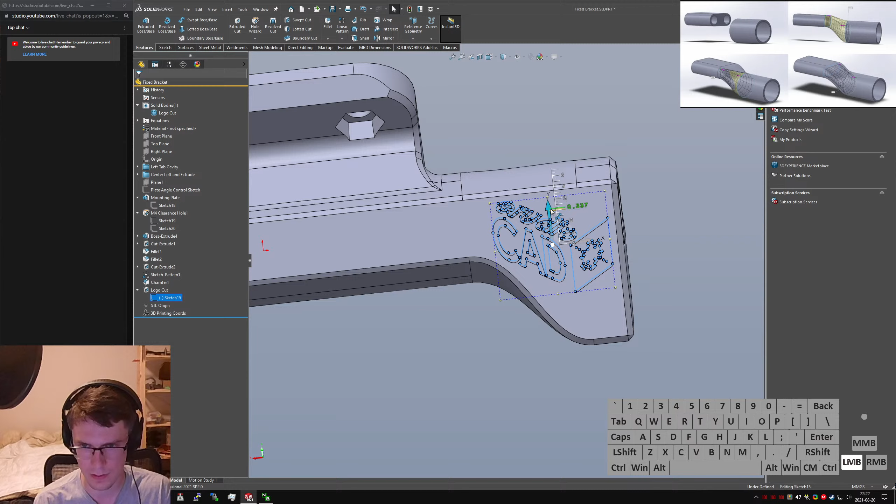I think that's an alright spot, though.

Yeah, I think that's it. I think that's the trick.

A little bit want to clean up in there, but not really enough to do it properly. Oh, my dad's not too disappointed I got rid of the butt cracks in the front.

Let's do a quick peek at the curvature there. Oh, real gross. Turn it off. Don't look at it. You didn't say anything.

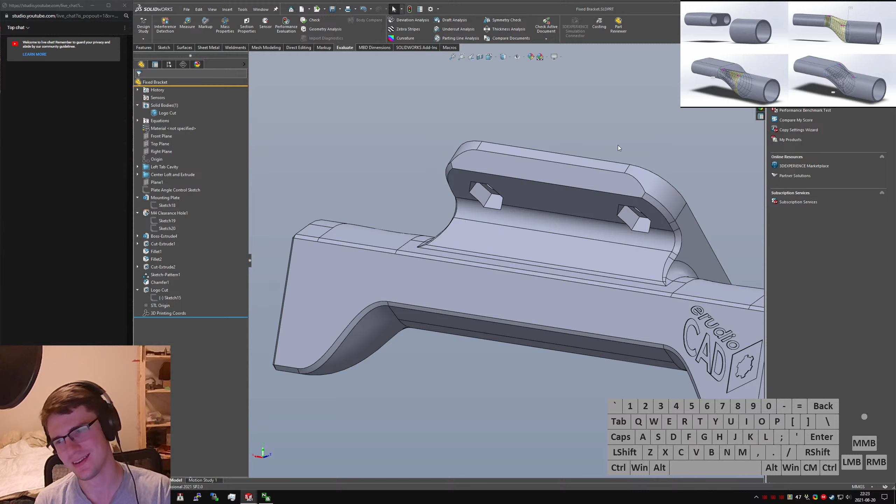You know, I specifically remember my dad saying that he was going to use Imperial fasteners on this, because that was what they suggested, but I'm going to design it for metric ones, because nobody can stop me.

Okay, well, I've been going for an hour and 20 now. Guess I didn't get to the end of this album yet. Man, I didn't even get 8 minutes of this album. Still a good album, though. The album is Being Where I Thought I'd Be by Just Neighbors. So good.

Man, I almost want to put, or no, hang on, not here, but a rib across here.

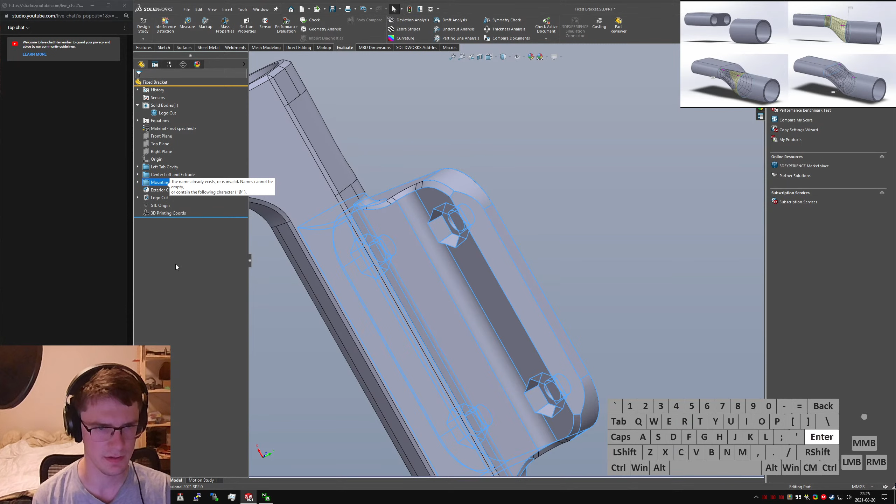Mounting ASDF SDF. This is going to be the mounting plate extrude. Always add the feature name at the end of the feature, just in case the icons change at some point in the future. They never will, but like, what if they did?

Right after the connecting boss, well, after the fillets, let's do, oh, blanking on what it's called. I can't believe this. Well, let's do it before that fillet, because then I think I can catch a couple of fillets out at once.

Rib feature. Nope, not a rib. Not an extruded boss. A rib.

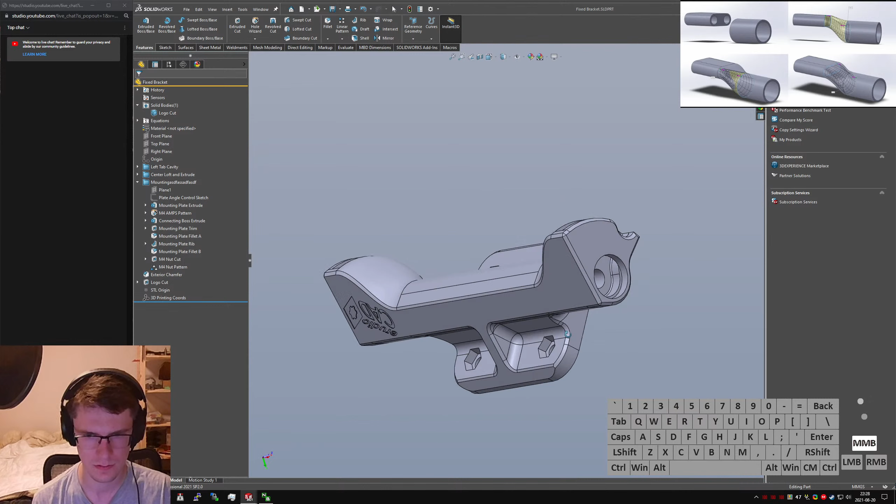Okay, if I go back up to the rib, and I say delete you, delete this, delete. Say sketch, right plane, tangent, and coincident, and pierce, and pierce, and pierce, because I know these are, I mean, that's not necessarily safe, but I think in this case it is.

And let's see if they will both go towards the part, because I have this sneaking suspicion that they will not. Only one open profile. Okay, let's...

This is going to be real bootleg. I don't think this is going to work. Yeah, it didn't work. It's nuts. Okay, so let's just undo a whole bunch of things real quick. Gotta love a long undo history.

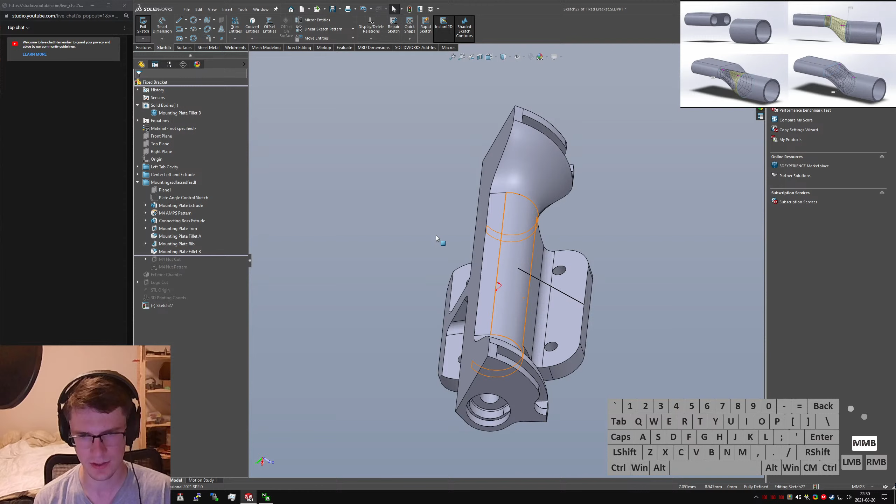I'll just add a quick rib in the other direction. Got a choice: flip material side, yes please. Still time.

Mounting plate rib A. I mean, if I got a choice. Mounting plate rib B. Or fillet B. Select tangency.

Oh, that's gonna do the gross thing. Fixed. Now it'll get a nice smooth transition. No, it won't. It'll break anyway. Very cool.

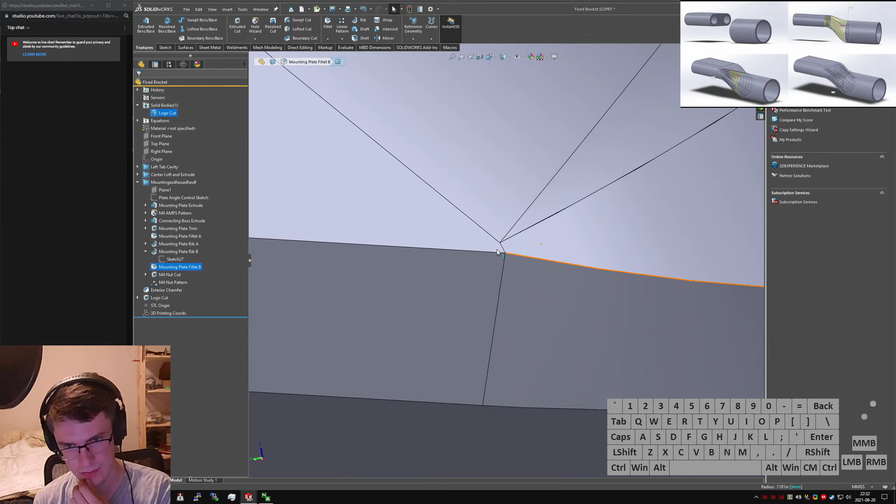Okay, I'm going to refrain from adding any more ribs, because if I do, I'm going to go nuts. I almost want those to be a little bigger, though. Kind of worried they might goof with that, though.

No, you know what? I think that looks good. Okay, gonna call it a stream here.

Because the rest of it's just gonna be me setting things up in Cura and then sending it to my dad's house. So, yeah.